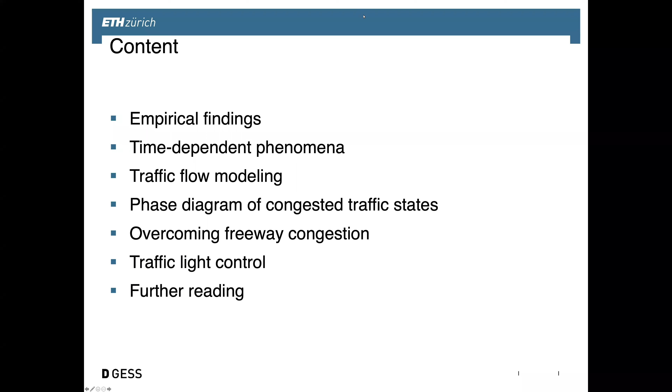Today we'll have our lecture on traffic. The pedestrian lecture will be done next week. We've gone through all the slide sets again, and we'll start with the one-dimensional collective dynamics. Next week we'll focus on two-dimensional interactions of people.

Today we'll focus on empirical findings. We'll talk about time-dependent phenomena, traffic flow modeling, the so-called phase diagram of congested traffic states, how to overcome freeway congestion, and then we'll enter the subject of traffic light control.

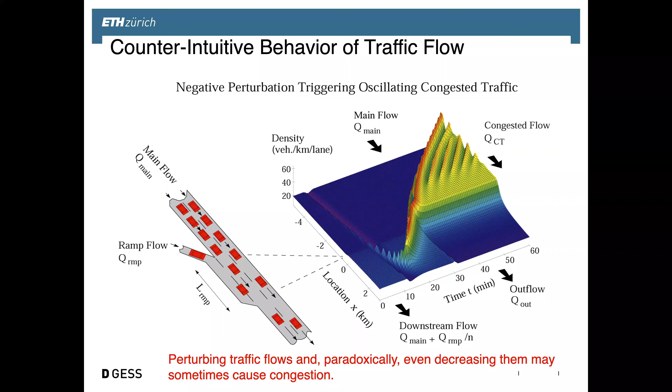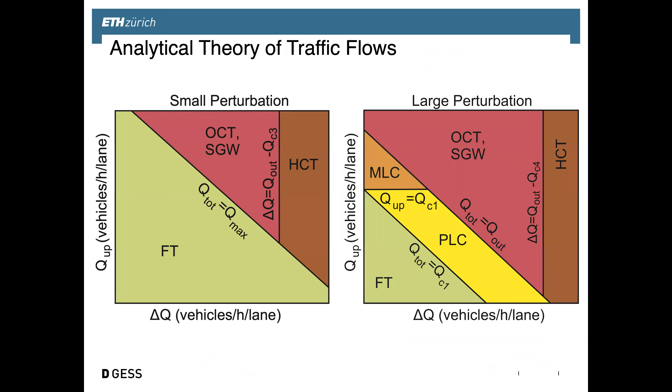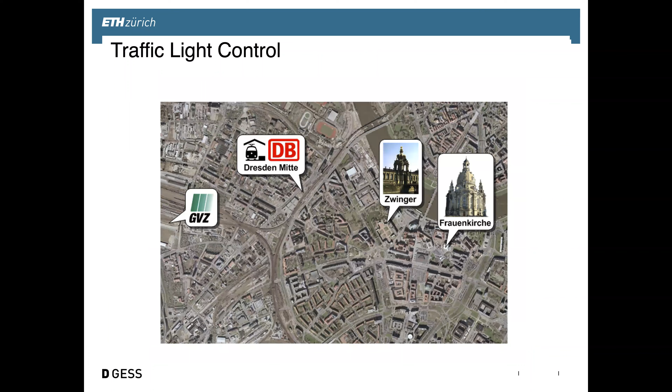We'll talk about congestion patterns. We'll talk about the analytical theory of traffic flows shortly. We'll talk about self-driving cars or autonomous vehicles. We'll talk about traffic light control. And now we'll start with the empirical findings.

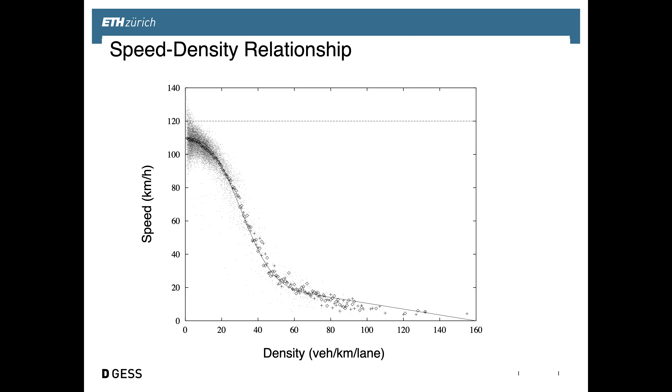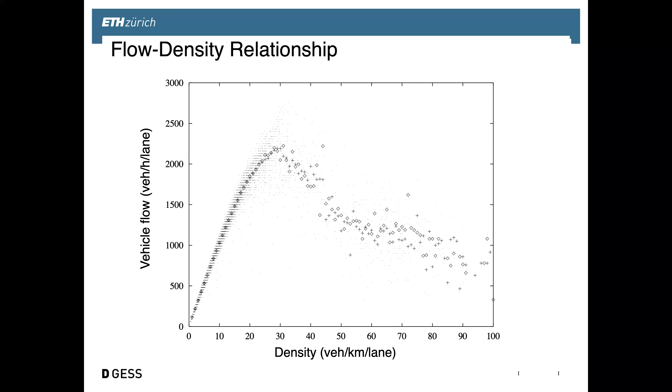This is sometimes approximated by what they call the fundamental diagram, and that summarizes a lot of features of traffic flow. However, much more interesting are, of course, the dynamical phenomena.

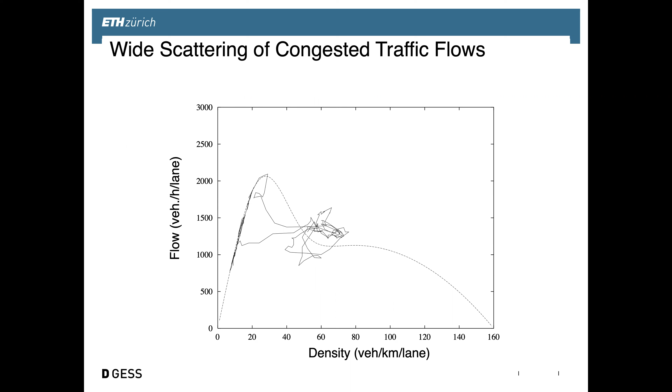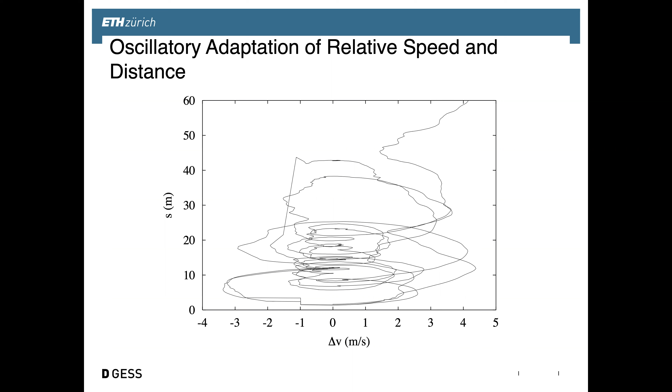And that, of course, has to do with the limits of the perception capacity of the driver, and also with difficulties to control the car exactly. I mean, doing good enough, obviously, but these kinds of oscillations happen in particular when the density goes beyond a certain threshold.

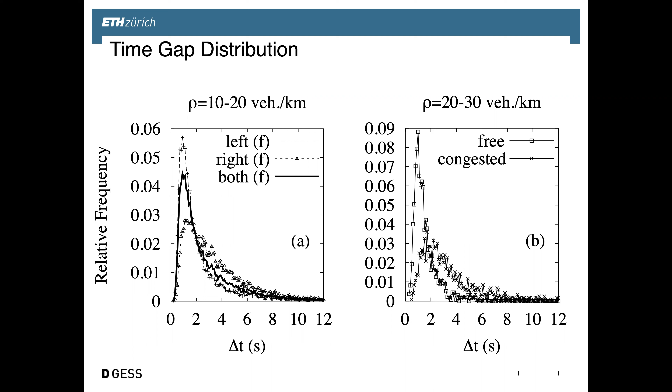And particularly in congested situations. So what you see over here is that once that happens, the time gap is actually increasing on average when traffic gets congested. And as the time gap is increasing, the flow is reduced. Why do we need the higher time gaps? Well, basically, in the unstable regime, in the congested area, you need to have more safety distance in order to be sure that there will not be an accident.

So related to this increase of the time gap, you see that the flow is actually dropping. We're talking about a capacity drop over here.

This is a very important finding, because basically when traffic reaches the maximum flow, it turns out that the flow becomes unstable. And then we have that capacity drop such that the same road, say the freeway, would only process less vehicles per hour and lane than it could potentially process in free traffic flow. So the road loses capacity, and it loses capacity just when we need it most, when there is a rush hour.

This is a very important finding, because it basically says that we need to delay the capacity drop as much as possible. Actually, we need to avoid it. In this way, you can reduce congestion and reduce travel times a lot. We'll later learn what actually triggers those capacity drops. In fact, it's possible to delay them. And that is where technology comes in.

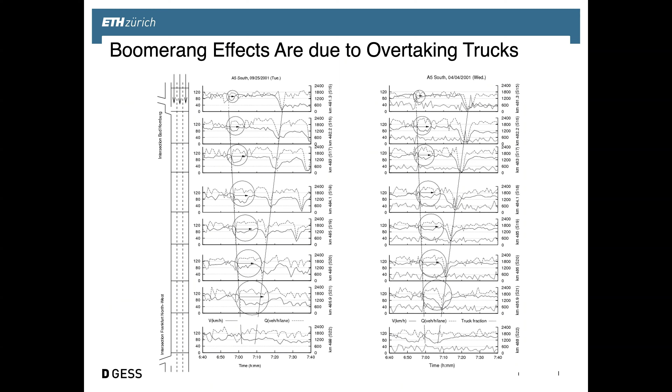80 kilometers an hour. So what happens when one truck overtakes another? Basically the freeway is blocked. There is a blockage that moves at 80 kilometers an hour, and cars arrive which move faster, so they queue up behind those overtaking trucks. That platoon of vehicles grows bigger and bigger as more cars arrive—this is what you see here. Once cars are trying to move out of the freeway, that creates an additional perturbation, and that makes traffic break down. So yes, if you don't allow trucks to overtake during rush hours, these kinds of effects are much less frequent.

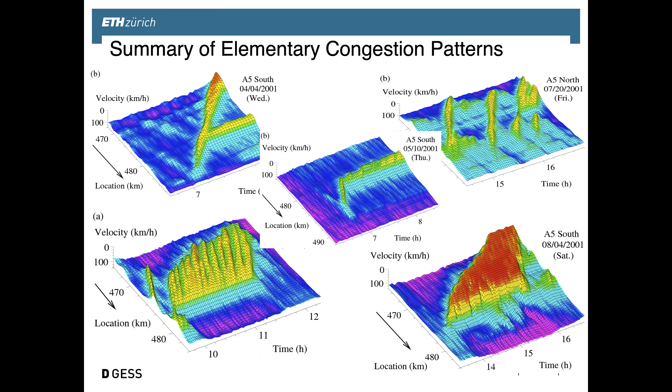Okay, so here are the different congestion patterns again, the elementary ones we talked about before, and these are to be understood with traffic models. In fact, here you find simulated patterns that look similar to those we've just seen. Of course the real patterns don't look as regular or perfect, but also those models are a lot simpler—they don't even distinguish cars and trucks. Of course that can also be done, but to understand those congestion patterns, it turns out not to be necessary.

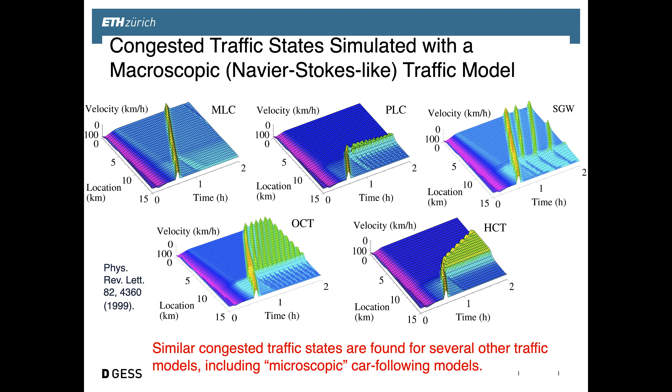So in other words, there are some traffic models that reproduce those elementary patterns, not all of them. Different traffic models may produce different patterns, and some of them will be able to match those actually found empirically, and some of them not. Then perhaps one shouldn't call them traffic models, but anyway.

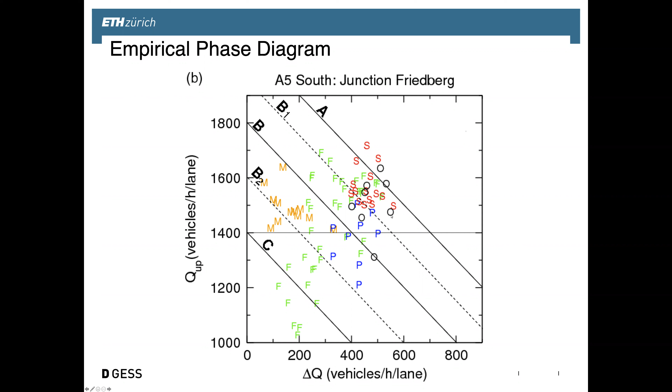So the moving localized clusters, M, are in a certain corner of the plot. Free traffic flow goes up to here, but there's overlaid congested traffic—pinned localized clusters here, stop-and-go waves there, oscillating congested traffic over there. And now, if one also considers that the outflow from congestion, which is also a typical traffic constant in principle, is about 1,800 vehicles per hour and lane...

This so-called traffic constant, however, still depends on the weather conditions, right? Most models don't consider weather, but there's a difference between data and models in many cases. But considering this dependence on weather, we can basically rescale the flows. And if we do that, then suddenly the empirical pattern of the diagram of the congestion patterns looks a lot more ordered. So we have a very clear picture, in fact.

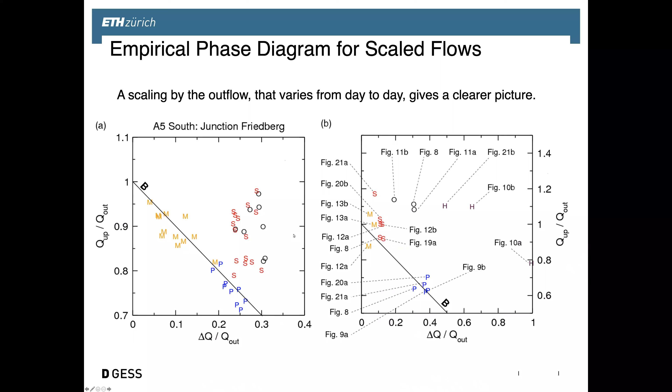And this turns out to be actually well compatible with what we call phase diagrams of certain kinds of models. Now the phase diagrams depend on the kind of model. Scientists came up with probably hundreds of traffic models—what they thought were traffic models—and they produce different kinds of collective patterns, congestion patterns, right? But each one might have different characteristics.

And those characteristics are basically represented by a so-called phase diagram that shows what kind of outcome you have as a function of the upstream traffic flow and the bottleneck strength. This could actually be the on-ramp flow, the flow of cars entering the freeway. So the sum of both would correspond to the overall traffic volume downstream of the on-ramp.

Those diagonal lines basically correspond to the same traffic volume downstream of the on-ramp. For little traffic volume, we have free traffic. For large traffic volume, we have congested traffic. This is what you expect.

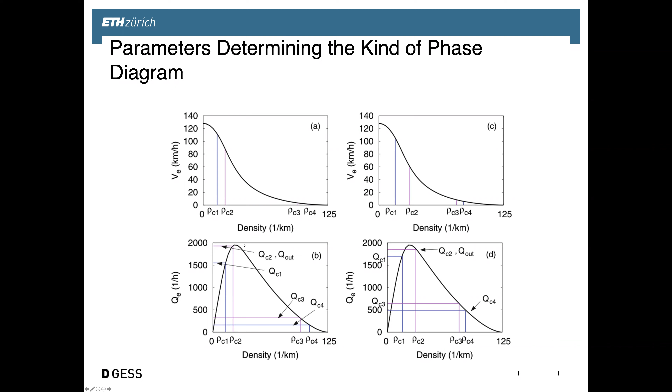There are flows corresponding to those densities, those so-called critical densities, and the relative positions and the sizes of those flows basically determine the phase diagrams that you get.

There are situations where the traffic pattern might be history dependent, as I mentioned before. Small perturbations would cause a different outcome than large perturbations. That means you could either have free traffic flow or congestion.

Congestion for large perturbations, free traffic flow for small perturbations. And that makes things complicated, but complicated means interesting for a scientist. But for the engineer, it's also interesting because where you often have congestion, you could in principle have free traffic flow. Obviously not everywhere, but all those areas which are overlapping with free traffic could be turned into free traffic with some piece of technology.

Do you understand why it's important to have these phase diagrams? Because they deliver insights into how the system behaves, under what traffic flow conditions, and why. That basically delivers us some new solutions, okay?

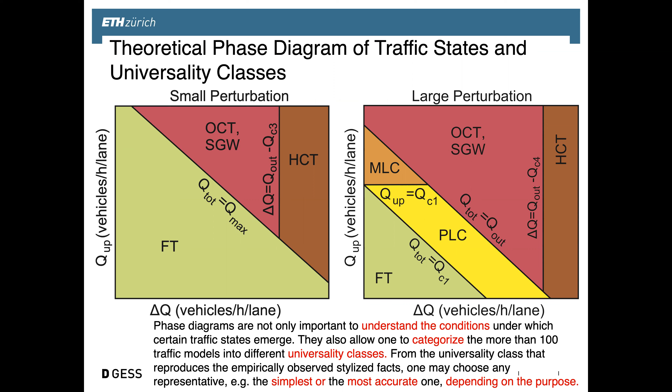Now also, you can basically classify different traffic models according to the phase diagrams that they produce. And then you would choose that class of traffic models that has a phase diagram which corresponds to the empirical phase diagram, okay? There's one question.

What does M, P, S, and O mean? M is the moving localized clusters, P is the pinned localized cluster, O is the oscillatory congested traffic, and S is the stop and go wave. There's also H in some plots, and that is the homogeneous congested traffic.

The nice thing is, once we know when congestion started, and that is something that was probabilistic, as I said before, because it may depend on a single overtaking maneuver of two trucks, once it started we can basically calculate quite well the extension of the traffic congestion and also the delay time that this will cause.

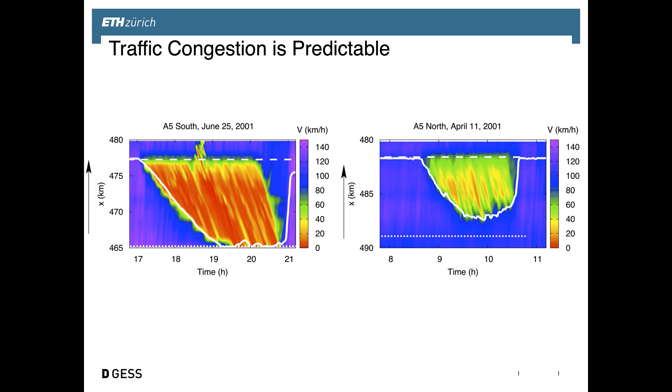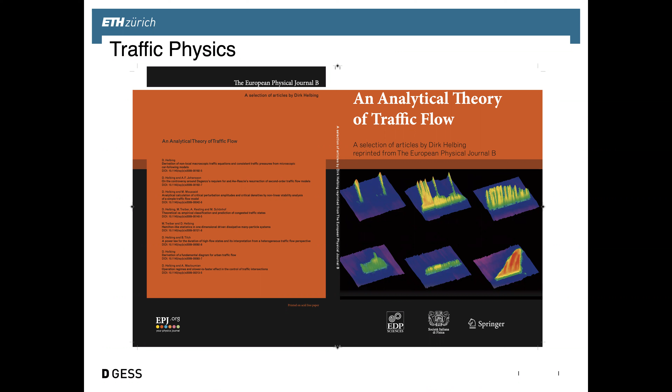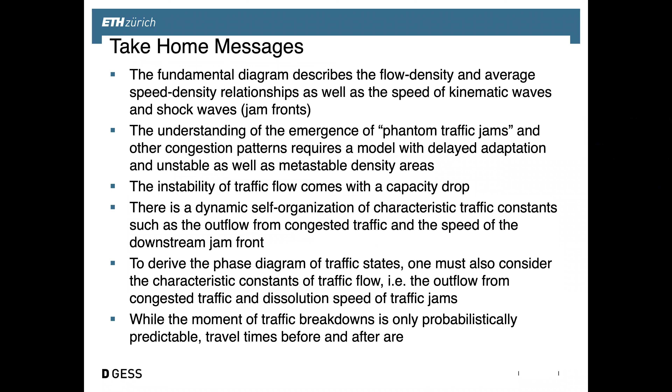This means we have actually gained a very good understanding of what is happening on our freeways, even though we've seen those complex patterns in the beginning that look pretty hopeless to understand. But by breaking it down into those elementary traffic patterns, it was actually possible to understand it, to model it, and also to make some predictions. And I think the take-home messages you can read at home.

And now we have actually applied this insight in order to come up with new kinds of adaptive cruise control systems. These are systems that are based on, for example, a radar sensor or a laser sensor that measures relative velocity and distance of cars, and would let the car automatically accelerate or decelerate, right?

And the cars could try to mimic the behavior of real drivers, or they could change the behavior of acceleration and deceleration a bit. And this is what we have actually done in order to dissolve traffic jams.

Now, cars, of course, are getting smarter and smarter. We've done that kind of work many years back with a big car company. That was in 2007, where I think nobody almost was talking about Google Cars at that time.

We were already working on board data acquisition, what we could call perception, inter-vehicle communication, cooperative traffic state determination, something that we might call cognition or something similar. Adaptive choice of driving strategy, could call that perhaps decision making, and drivers would be informed and traffic assistance would be given. And in many cases, you would basically have cars accelerate and decelerate autonomously.

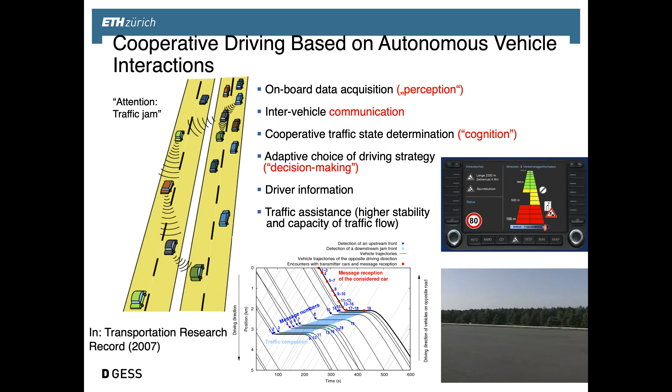Most importantly, it was not only more comfortable for the driver because the car was driving for them, but we've also developed that system in a way that we would have cooperative effects. The traffic flow, in fact, would be stabilized using different kinds of data. But most importantly, we have stabilized the traffic flow by changing the parameters in this equation.

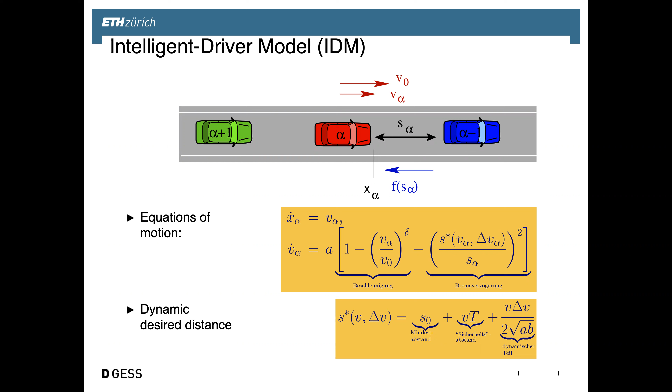Not dramatically, so it feels still very natural what the car does as compared to what the driver would do. But those constants A, B, T, they're being changed. So in free traffic flow, we basically try to imitate what the driver would do.

But then when the upstream end of congestion is approached, the deceleration constant is being multiplied with a factor of 0.7 over here. And then eventually we'll drive in the congested traffic area. Then comes driving in the bottleneck section, and eventually you arrive at the downstream end of the congestion.

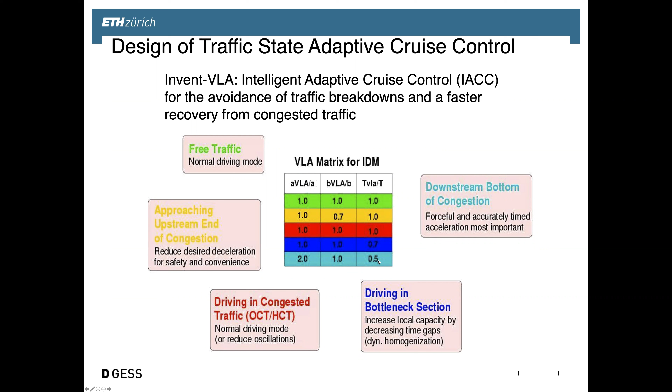And here, most importantly, cars accelerate more forcefully. This is important for the sake of stability. And at the same time, the time gap is reduced, which is important to have an increased capacity. So this taken together basically changes the outcome of collective traffic flow patterns.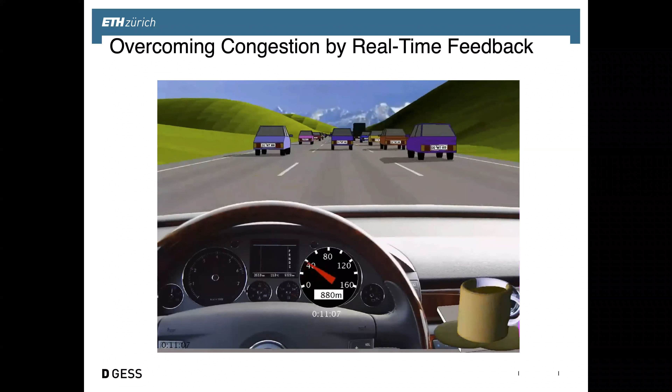What we're doing here is we're first simulating stop and go traffic as we find it actually in reality. I've seen that many times, I guess. And this is just to illustrate that the models basically reproduce realistic driving behavior quite reasonably.

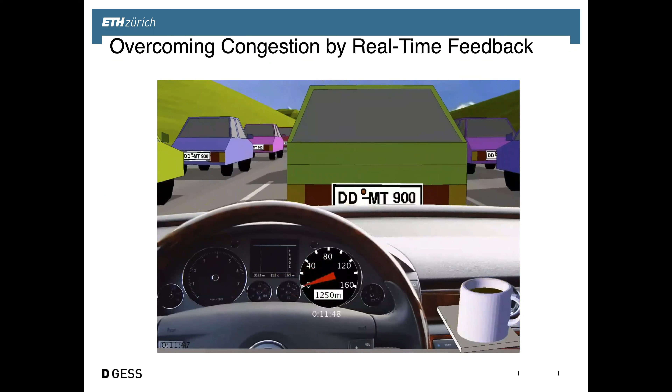And now to see the reason for that traffic jam or stop and go traffic, we take a helicopter, and now we see an on-ramp actually, where cars are trying to get into the freeway, and that produces small perturbations that are being amplified, as we discussed before, and that produces a stop and go traffic flow.

However, we'll now turn on in a few seconds the adaptive cruise control system, or traffic assistance system, VLA, that accelerates and decelerates slightly differently, as I said before. And as you can see over here, the traffic flow is stabilized and the traffic jam is dissolved, even though the same number of vehicles is entering the road.

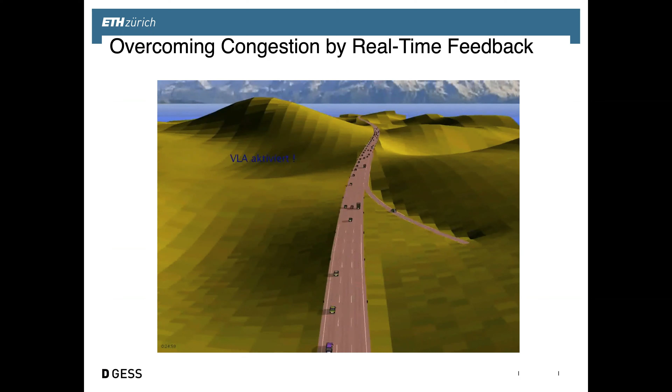So now basically the road can handle a higher number of vehicles without additional road capacity. I mean, without additional lanes, right? Just by changing the interactions between the cars.

So basically, what made this miracle happen was not a traffic control center that was trying to control every single car, but a real-time measurement and feedback that changed the interactions of cars in such a way that a different self-organization effect would result and a different collective pattern would come out, because we've seen before there are different kinds of traffic states. And to some extent, you can change what traffic state would result. And of course, you're interested to have less congestion and, if possible, free traffic flow.

Dirk, there are a couple of questions in the chat.

Yes, please. First one: is VLA activated for all vehicles? That is extremely interesting. It's not necessary that all the vehicles are equipped with that kind of technology. So if there's 30–40% of vehicles doing this, it would already have this dissolution of the congestion effect. And I think that is particularly unexpected and interesting.

In fact, you're seeing it on the next slide. So what I'm trying to show here, we're now living in the Internet of Things age, where it's cheap to measure what different components of the systems do. And this allows us basically to build a new kind of control approach. We can make the invisible hand work, basically, the self-organization work for us.

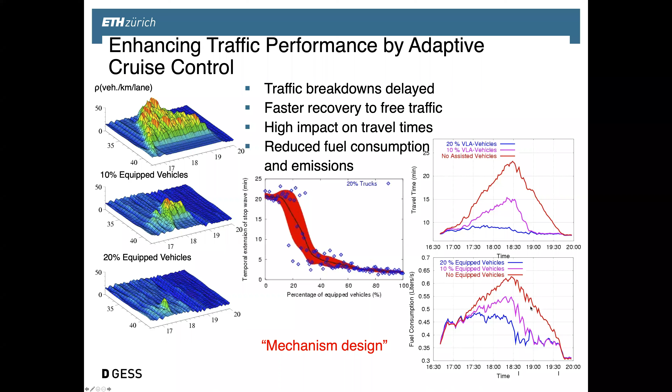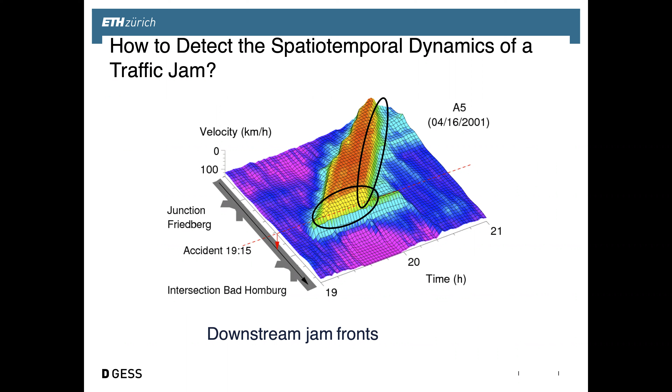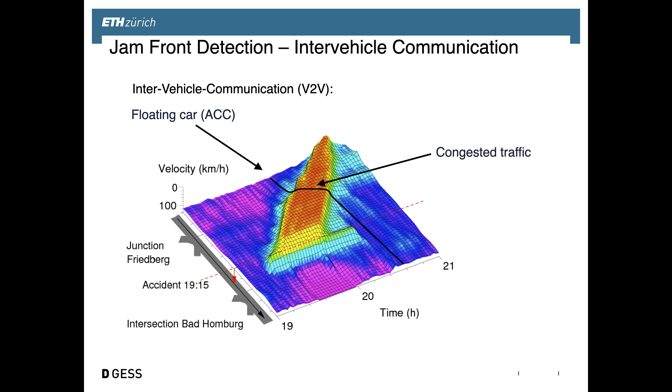And now, of course, you need to know where the fronts of the jams are in order to adapt your driving parameters accordingly. And every equipped car would actually measure data, and that kind of data would then be transmitted to other cars with that piece of technology.

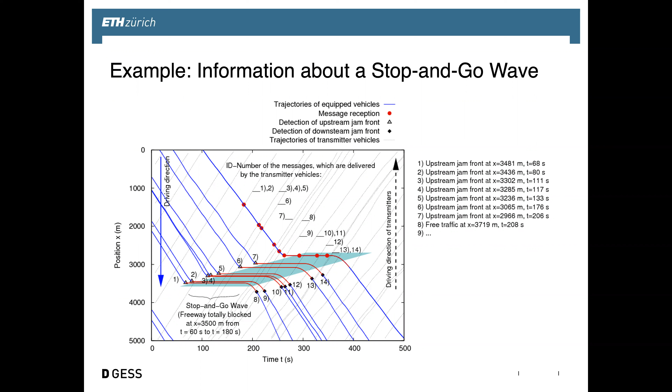If only a few cars have that technology, it's difficult to transmit that data and make that collective favorable pattern work. But if you transport data using vehicles coming the opposite way on the other lanes, it turns out that a very small equipment grade, like 3%, would already allow that communication system to work. But only if cars help each other, meaning we carry information from the opposite flow direction. That can be programmed in, and in this way we get information about where traffic jams are located.

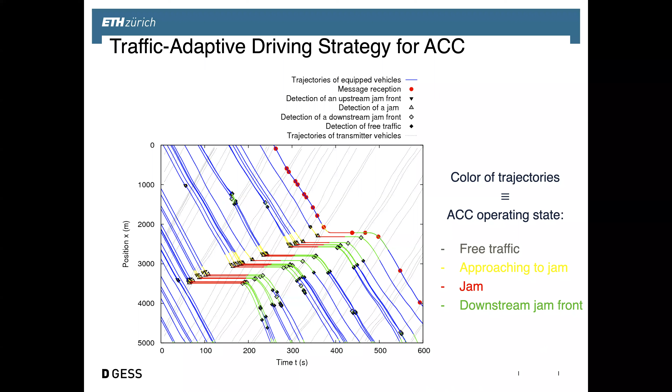So we can adjust the parameters accordingly, and we can dissolve traffic flow. Any further questions right now?

There was another question by Samuel about whether it's impossible for human drivers to learn this type of driving. I think to some extent you can learn it, but even experienced drivers have their limits, because our human senses haven't evolved for traffic flow. It's very difficult to determine the exact distance between two cars and the exact relative velocity—it's just an estimate people have. Technology can measure that more precisely, and reaction times can be reduced, which can be used to come up with a more favorable organization. I'm not talking here about brute force platoon control in a centralized way, which other research teams have looked into. I'm not so convinced of that personally, but people are trying it too.

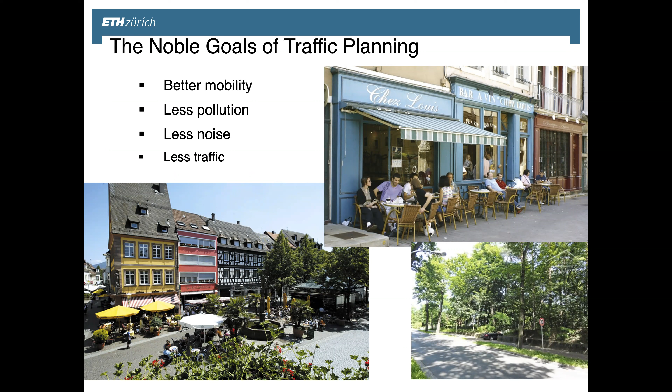Traffic planning has noble goals—we want better mobility, less pollution, less noise, less traffic. But the reality is often this: a lot of congestion and urban gridlock. The question is, does it have to be like this?

We've been inspired a bit by how cells in a human body work. Each cell has a center, a nucleus, and transportation—so-called filaments, a bit similar to train tracks or roads, along which vesicles, corresponding to vehicles, transport certain substances inside. These are the units, the vesicles. It turns out those vesicles don't produce congestion, which was very puzzling to us. But in fact, if there was congestion, it would be like a terrible disease—so our cells have learned to avoid congestion.

That was inspiring to us, and we thought maybe we have to reinvent the way to control traffic lights. Today we have traffic light control centers collecting as much data as possible about the traffic situation, trying to come up with an optimal control plan, and then imposing it on the city to control traffic flows.

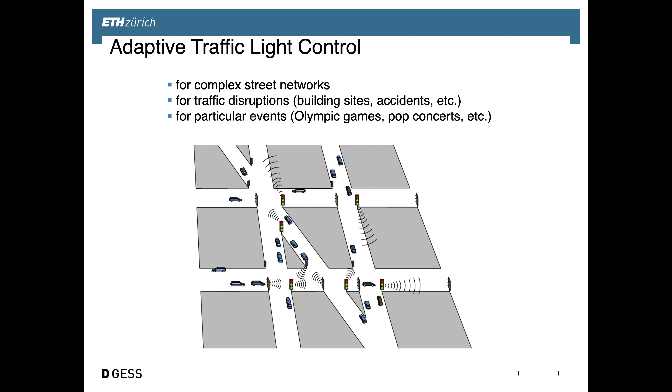We want something which can adapt to complex street networks and traffic disruptions, such as building sites and accidents, or particular events such as Olympic Games or pop concerts and so on. We had to model those systems.

Of course, you abstract the road network by a mathematical graph. You have to overlay the traffic dynamics, and here one could use a Lighthill-Whitham model, the partial differential equation introduced before.

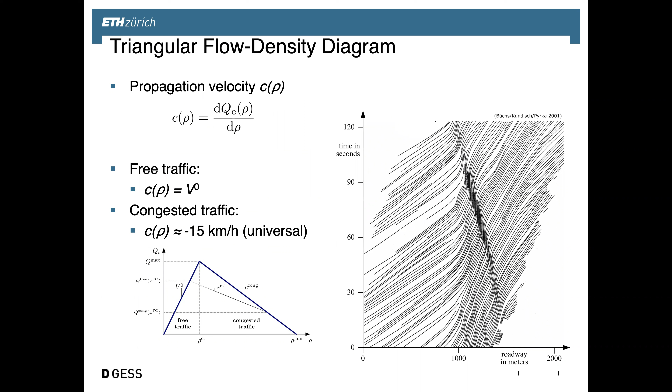There are basically two characteristic velocities: one is the speed limit, and the other is the propagation speed of the jam front, minus 15 kilometers an hour—that's the smaller case c here. This is the location of the traffic light—here it's red. Once you turn it green, cars accelerate. We assume it doesn't take much time to accelerate, that's why you have the straight lines. The jam front moves backwards as expected.

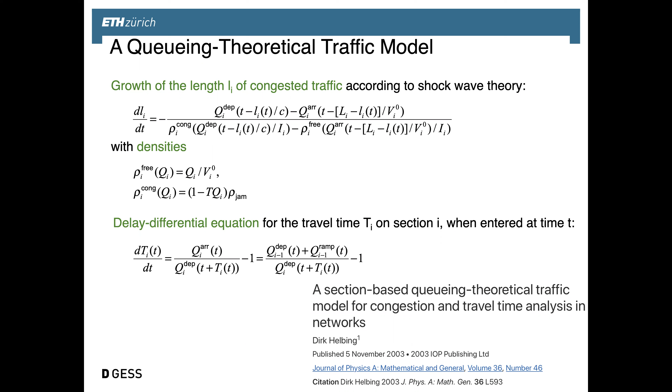Those partial differential equations can actually be transformed for a triangular fundamental diagram into a delay differential equation. So everything that happens in the road section is basically determined by the inflows and by the outflows. That really simplifies things dramatically. A very interesting thing, I would say.

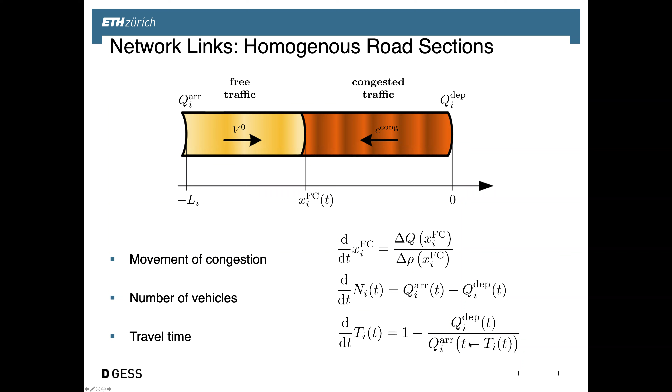So even the jam front and where the location is determined by the inflows, arrival flows, and the outflows and departure flows. Also, the delay time can be determined by such a delay differential equation. I really love this equation.

Now, I used to be a theoretical physicist, and here also we have conservation of flow. No cars are being lost or left behind. What flows in flows out, like the Kirchhoff law in a sense.

And that corresponds to the capacity drop, right? So basically, the goal must be to avoid the activation of the minimum function, that means to avoid the capacity drop.

I imagine that you have a system of many such equations that are coupled with each other. How difficult would it really be to avoid those capacity drops? You can imagine really that you can make a lot of mistakes on how you control the flows. It means your capacity of the road network really depends on how many of those minimum functions are switched on or off.

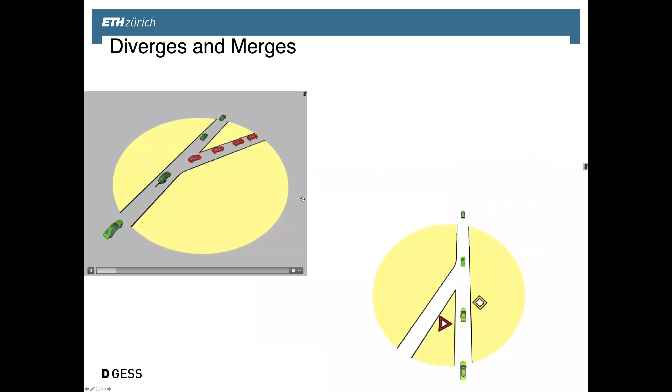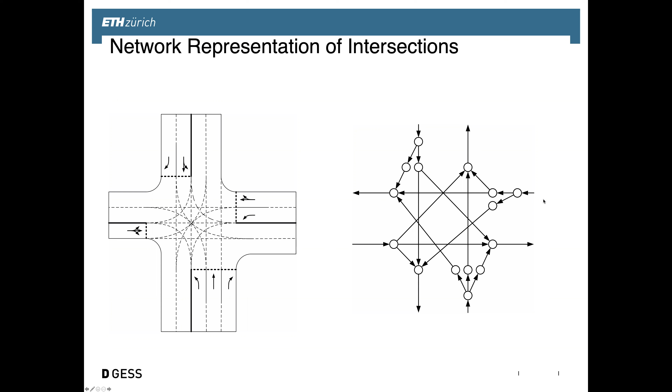Then each of those intersections might have different features, numbers of lanes. Do you have separate lanes for turning left and turning right and going straight, or do you have shared lanes and so on? So this is just one kind of intersection. It's already represented by a pretty difficult graph. And as I said, many intersections could be different, and all of those are then connected to each other. So it's really becoming a pretty messy graph.

But today, at least the data is available, and you can read it from a DVD-ROM or from just a database, and you can code an entire city as a master student, while before you may have needed actually 50 PhD students or so, to produce a simulation of an entire city. So yeah, availability of data has really changed things dramatically.

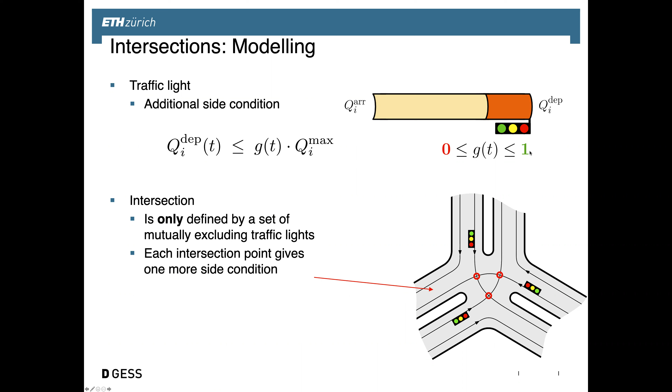Now we have to take into account also the traffic lights, and we do that by introducing a prefactor to the maximum flow. That was the 1,800 vehicles per hour in lane, typically. And so when there's a red light, G is 0. When there's a green light, G is 1. Okay. And that's about it.

And then you can start basically simulating flows. And the next thing is how to switch the traffic lights, and here, 2 of them only. And what we want to have is basically a system that produces a green wave. That means cars that pass one traffic light would pass another one without stopping, and perhaps even more.

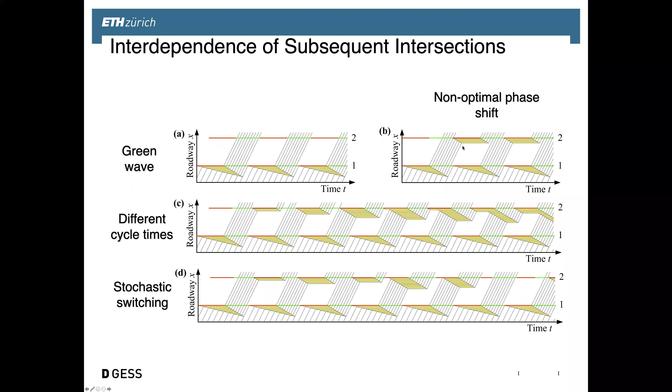But you can do a lot of things wrong. There could be non-optimal phase shifts, there could be different cycle times, there could be stochastic switching, and so on.

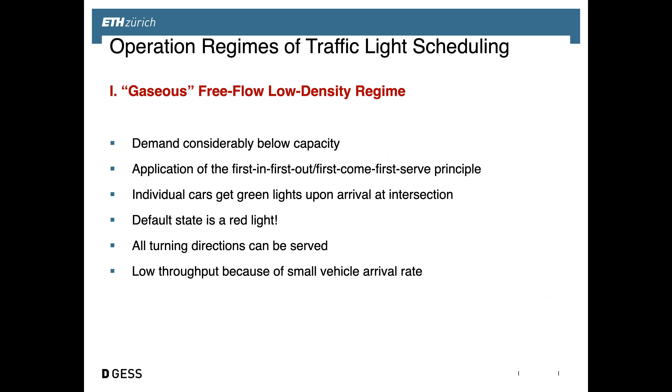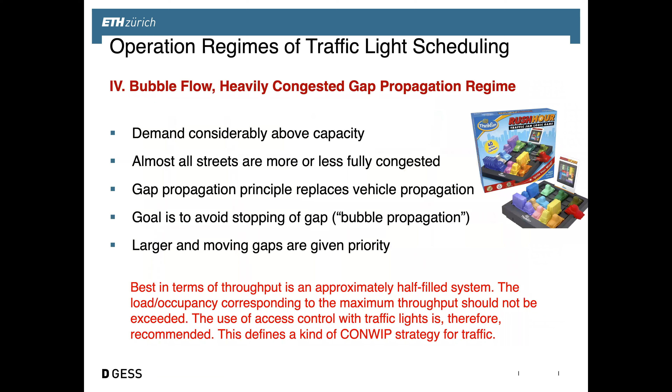Now, we'll accelerate things a bit. It's also funny to talk about this, but it's not that important. And what those slides basically wanted to say: there are different kinds of situations you can have or phases. But the most important thing is that we have actually tried to come up with a new paradigm.

One was going away from regulation or over-regulation to self-organization. That means approaches that would support the formation of coordinated traffic flows.

This magic happens because of the particular road or intersection design. They have a unidirectional flow in front, and in the back they have the opposite unidirectional flow. Most importantly, they have some buffer in between, which allows every traffic participant to adjust speed in such a way that they find a gap in the flow when they need one.

Of course, there's a lot of honking that you don't hear, and modern traffic organization would like to do the same wonderful self-organized traffic organization without much noise. That can be done with the Internet of Things, in principle.

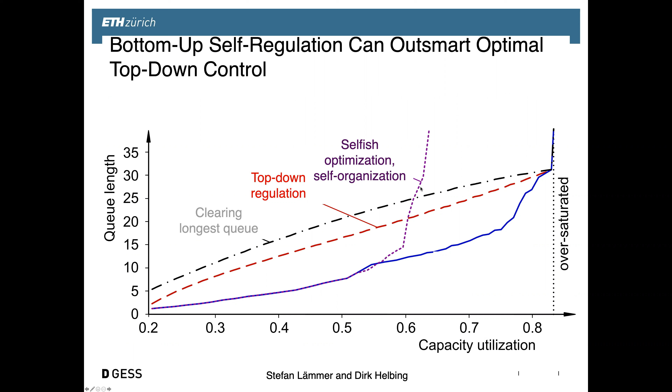But there is a point of capacity utilization where suddenly things go wrong and the queue length explodes. And then, of course, the traffic center says, hey, yes, that's actually why you have us. So we can say that for low capacity utilization, Adam Smith's invisible hand works—the self-organization is better. But there is an area where it actually fails, and where centralized coordination and control is needed, it seems.

But surprisingly, the third approach, this other-regarding optimization that takes care of neighboring intersections, does better all the way. So here we have basically a combination of travel time minimization with the clearing of long queues. This way we can make the invisible hand work—interestingly, by a combination of two mechanisms that separately fail to improve the traffic situation.

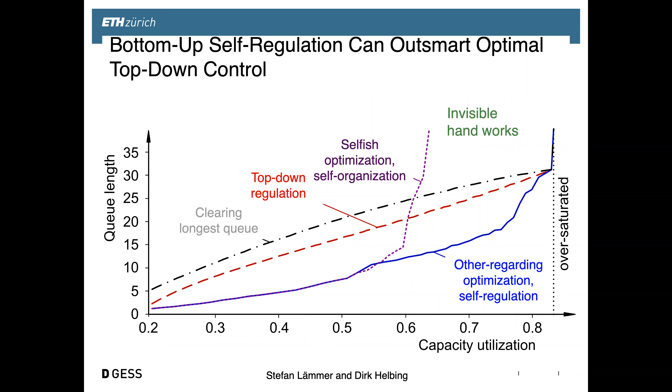This is quite unexpected, I would say. There is a different kind of organization here, still for a single intersection. If you have a regular inflow, it could happen that one road section gets served twice, while another is served once in a cycle. So new service patterns come about in adaptive ways. But as I said, it's actually improving performance.

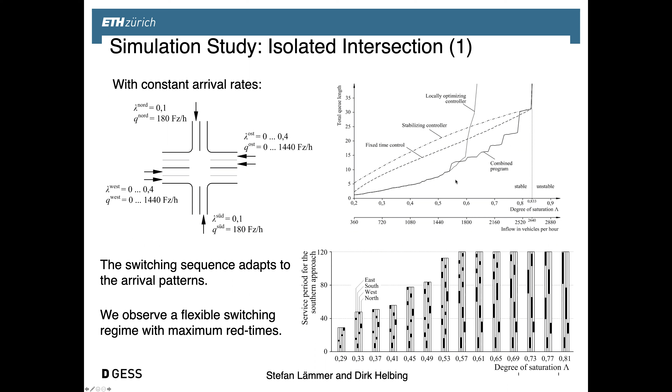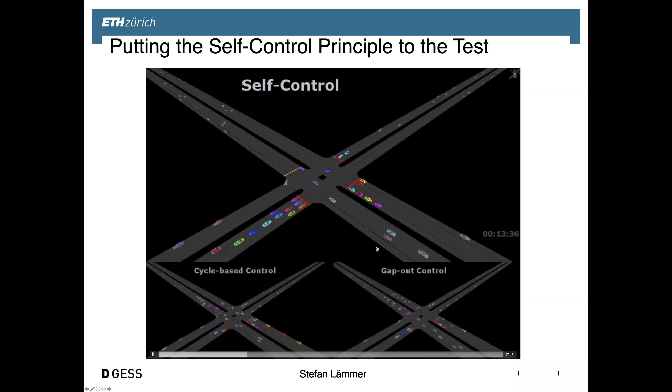That's good for everyone. We compare self-control with classical control approaches, and the queues tend to be shorter. I think you can see that slightly. And of course, we have to make a quantitative comparison.

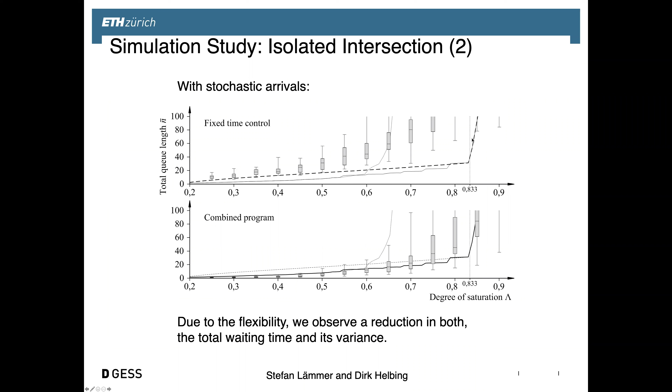It turns out that if you don't have a constant inflow into this intersection, but variability of the inflow, then the combined program, which is the third one regarding self-regulation, is actually working even better than fixed time control when there's a lot of variability. Then the question is, what happens if you have an arterial with many intersections?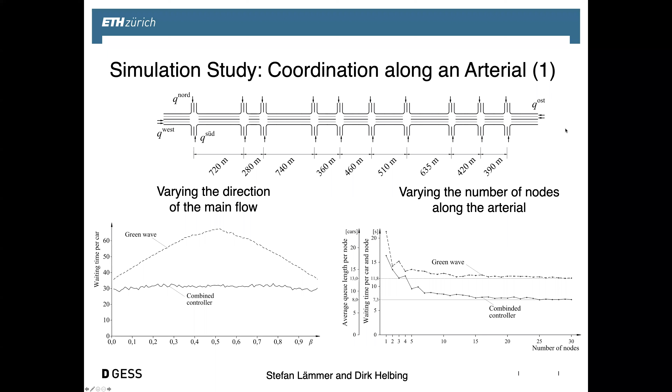If those intersections have even different distances from each other, it really messes things up, particularly if the flows in both directions are quite different. It turns out there's a huge improvement by the combined controller. It manages to coordinate flows nicely because of this adaptiveness, which considers short-term prediction of arrivals of vehicles.

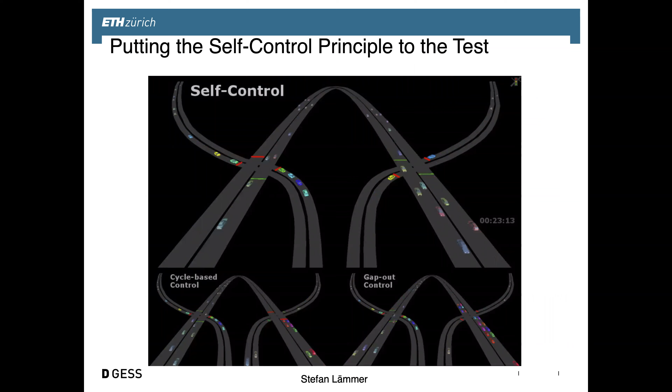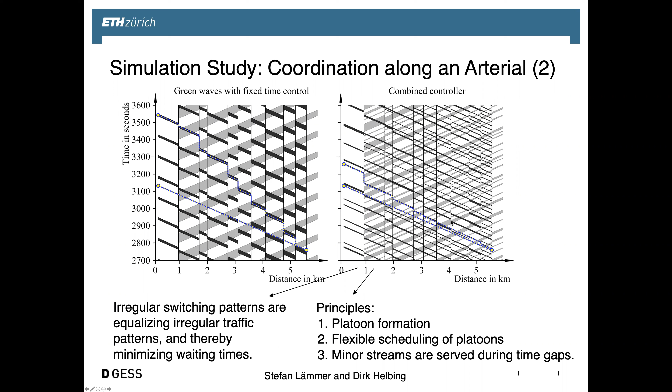We observed that also for road networks. Again, the combined approach is much better, and it goes so far that even if there's an accident, things are managed in a much better way. So here the road blocking happens. On the top, we have the consideration of long queues, and we avoid that road intersections are blocked, while below is what happens in, I guess, most cities of the world. Things get totally blocked and you have a huge mess that spreads very quickly.

Now the question is, how does it really work in real life? We've been talking to the traffic authorities in Dresden, where I worked at that time. Altogether they were happy with the system they had. I think it cost several millions. It was a state-of-the-art traffic control system that produced green waves and even adaptive green waves.

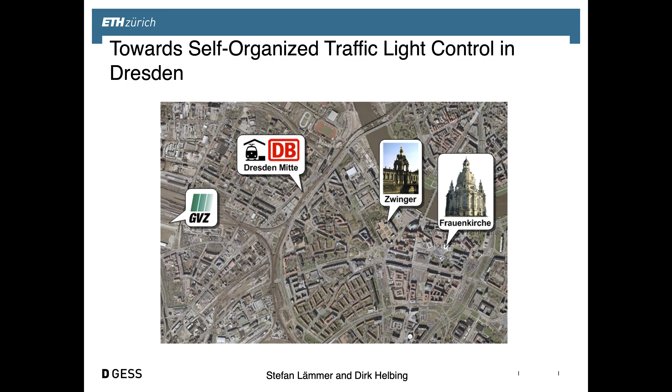But there was one issue: they had a very irregular road network, and on top of that, many trams and buses cutting through the area, taking different routes. They wanted to prioritize public transportation, but if they did that, it basically destroyed the green waves, creating monster traffic jams within a short time, so they couldn't prioritize public transportation. They said, okay, if you think you're smart, then take this.

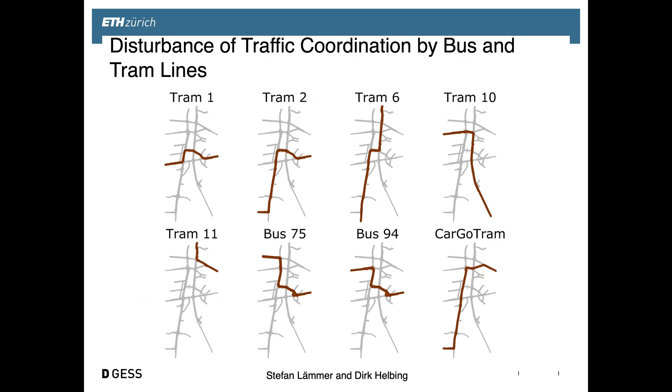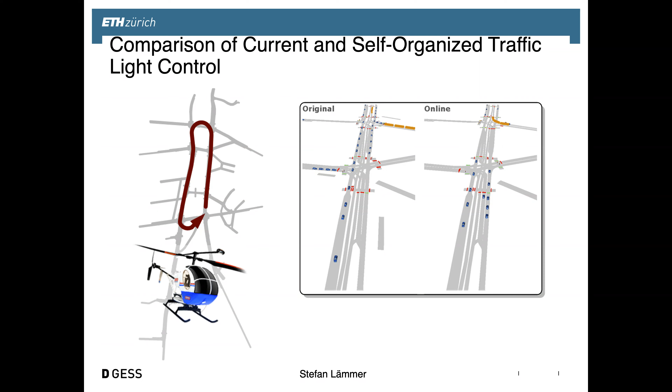In fact, Stefan Lämmer, who was my PhD student at that time and is still working in this area now, is implementing this control in reality. He was working on that, and he actually came up with a solution that worked better.

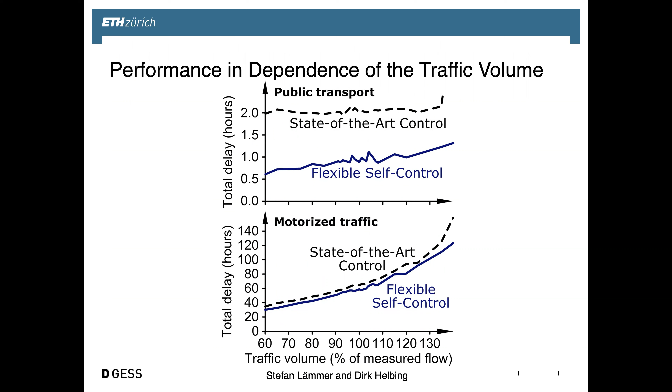As a result, it was possible to prioritize public transportation, but nobody had to suffer for that. The cars also had even improved service, and more so, even the pedestrians and cyclists. For the environment, it was better too. So basically everyone benefited—'more green for everyone' was the headline you could recently read in the newspaper.

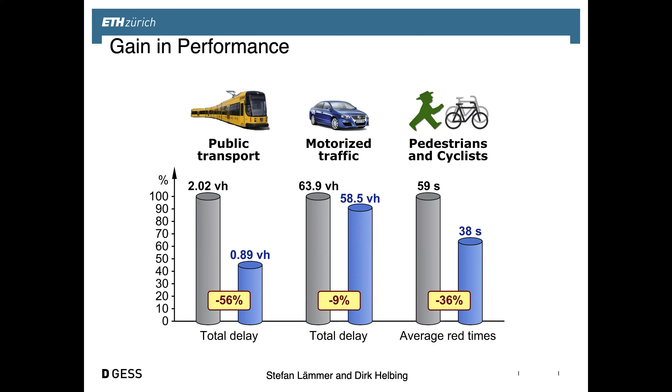This is amazing, and it's based on this new approach of bottom-up self-organization, where local coordination spreads throughout the system if you have the right kind of interactions. It's the interactions that matter for the outcome of self-organization. It could be terrible self-organization, but if you get the interactions right—which is the tricky, challenging scientific part—then you will have wonderfully adaptive and coordinated systems.

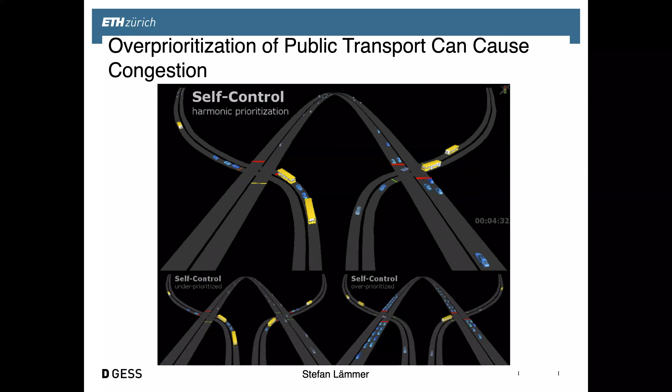And I see we're at the end of the lecture, time-wise, but also content-wise. So basically we're concluding that there are limits to centralized control. Centralized control works in many cases quite well, but not so well in complex systems with heterogeneous elements, large degree of fluctuation, short-term predictability, and then greater flexibility to local conditions would often perform better. So the higher the complexity of the system, if you want to achieve a high level of your goal function, then you need to give more autonomy of control. That is basically what the conclusion is.

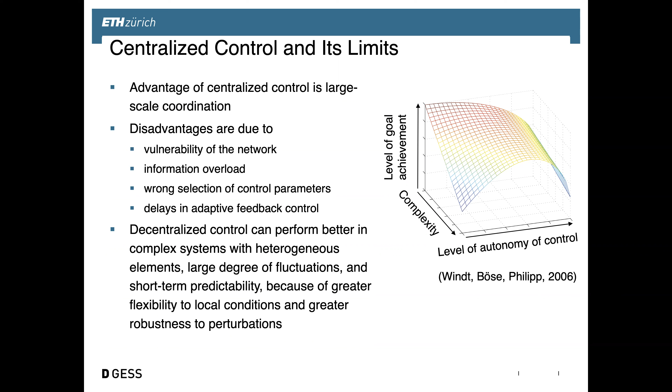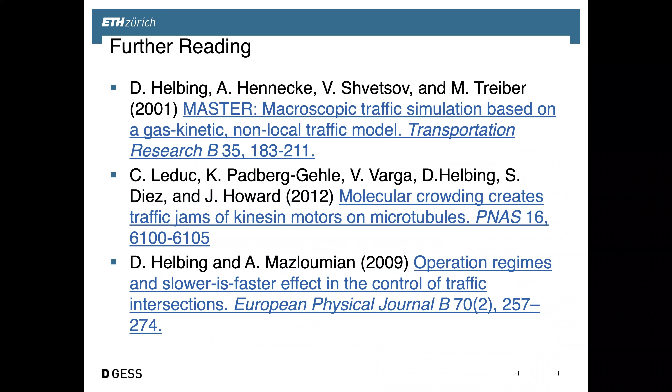And again, there's some take-home messages that you can read at home, and there's a lot of literature that you can also have a look at. Are there any questions or comments?

There's one question: are roundabouts better than traffic lights? That's a good question. Actually, yes and no. It sounds like the answer of a lawyer, but not quite so. Roundabouts work very well for small and medium level traffic volumes. If you have high traffic volumes, however, they're reaching their limits, and then you need traffic lights to support the coordination. But in fact, many intersections that are now controlled by traffic lights can actually be replaced very well, and even better, by roundabouts. And that's why you see more and more of them.

I think one more question, right? Can you read it to me? Yes, it says, how hard is it to implement these adaptive solutions? Is it easy to apply for any situation?

I think it really has a lot of advantages. It can be fit into existing systems, can replace, say, the control of single intersections. You can, of course, also do it for the entire city, or for cities where you don't have such a big budget. You don't have to use necessarily sensors that are below the road surface and cables that connect those sensors with the traffic control center. Instead, you could have local sensors and perhaps wireless communication locally. As everything is local, you can save a lot of money potentially, and that is an additional benefit. It has benefits for traffic participants, benefits for nature and environment, and benefits for your budget as a city, I think.